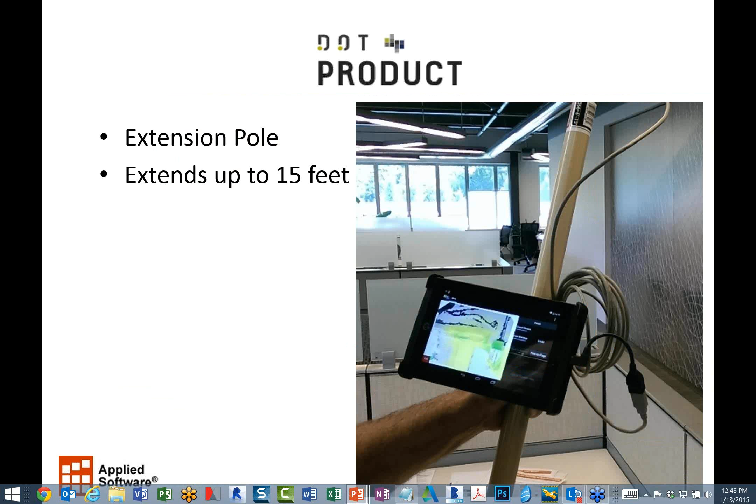So hopefully that's given us some context of the point clouds and what the scanning is. Let's look at how this data truly is being captured. For this particular scanner, they have this proprietary software called Phi.3D, and basically it's launched on the tablet itself, and it goes through a little bit of a calibration.

Because if you remember, I said this was optics, so it's kind of doing the Wall-E thing, zeroing in, dialing in its eyes to get the right calibration and information. Once it's on and warmed up, ready to go, we can hit basically the start button in the upper right corner, and it starts to capture that information. Even if it's gray, black and white information, it's still capturing it.

But eventually, when we start to kind of wash the scene, they almost give this washing motion, and I relate it to like a bad spray paint job where we're overspraying and capturing information. But again, you're moving around, we're able to go left to right and up and down, and it's tracking where you started.

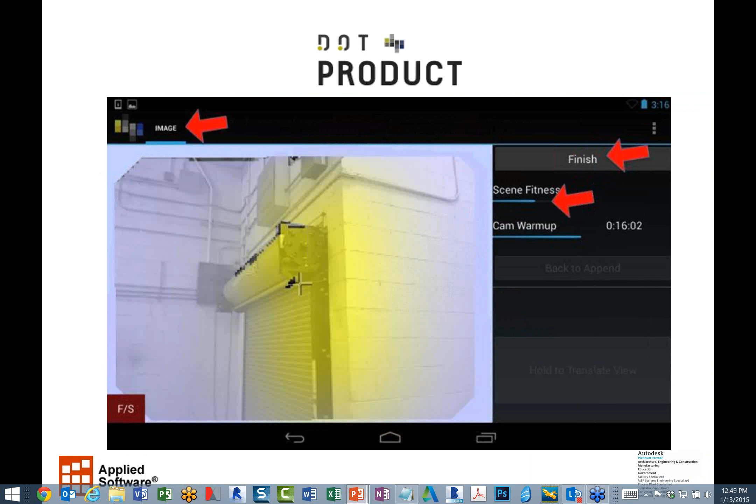So it knows this overhead door spool corner condition, it recognizes that, so as we move away, it remembers and knows where that data and information is, and it will be tracking from that location.

But if for some reason you slip, you trip, you jump, or somebody asks you what time it is, and you move the scanner really fast away from it, it will actually give you a message saying, hey, I lost the tracking, I lost where we were, but it's very forgiving, we can go back to a known point, and it will pick up that location, and we can continue scanning. Sometimes it will flash like an orange screen to say we lost the tracking, but it's very forgiving to come back and do that.

Now, one thing before I would want to leave an on-site scanning job like this is to make sure I have everything. So this has given us the opportunity to look at this data, to spin around, see what did I miss, or if it is something I missed, is it furniture or something I don't care about.

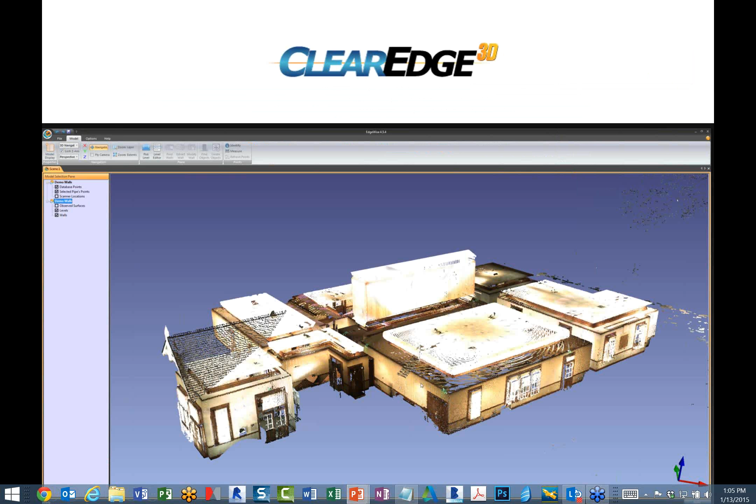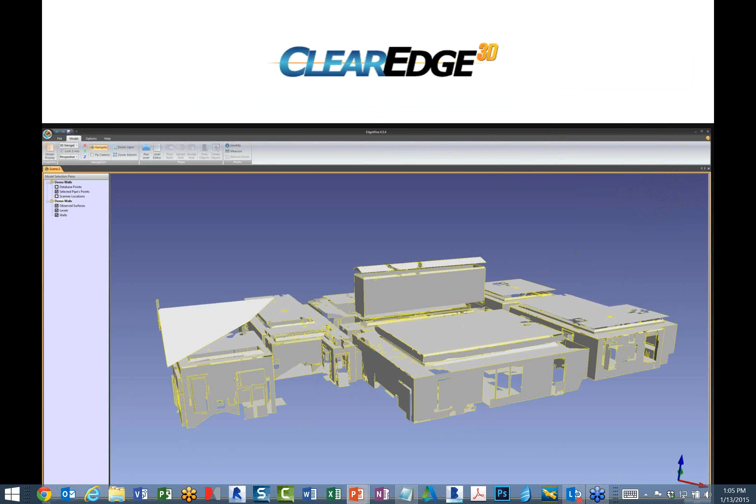So if I go in and turn off, up here in the upper left corner, some of the point cloud information, it then shows me the shell or the extrapolation of what it sees as flat surfaces that represent these planes or vertical wall surfaces. This is a matter of a minute - I brought it in, I turned this off, there it is, I'm seeing it. You can see some of these might have missing data, there's some gaps, that's partially due to the scan. Could be that some of the scans were missing or erased. But it's basically showing me what it interpolates as these wall surfaces.

And we haven't really even told it to chew or process anything yet. The next thing with this software is what I call building this sandwich. So it's already identified these vertical surfaces. The next thing is to find these flat surfaces, the horizontal surfaces, which would represent the floor, the ceiling, a soffit, a roof condition, or something.

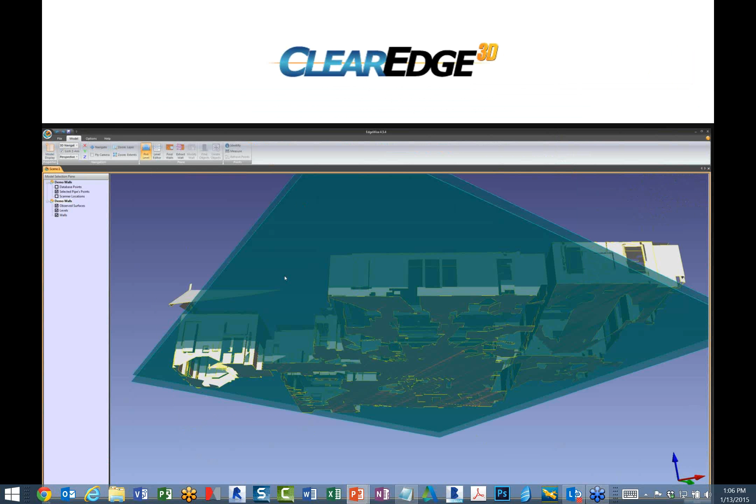So we're basically telling it, we're coming in here picking a level right here - I'm spinning it upside down, picking the floor, and you can see this particular scan has some holes in the floor, which is fine, could be furniture, a pool table, whatever. The folks, when this was scanned, decided we don't care about that information because we're going to just put in a complete floor. We're not going to waste extraneous time scanning chairs and furniture and pool tables. But basically what we're doing is building these planes.

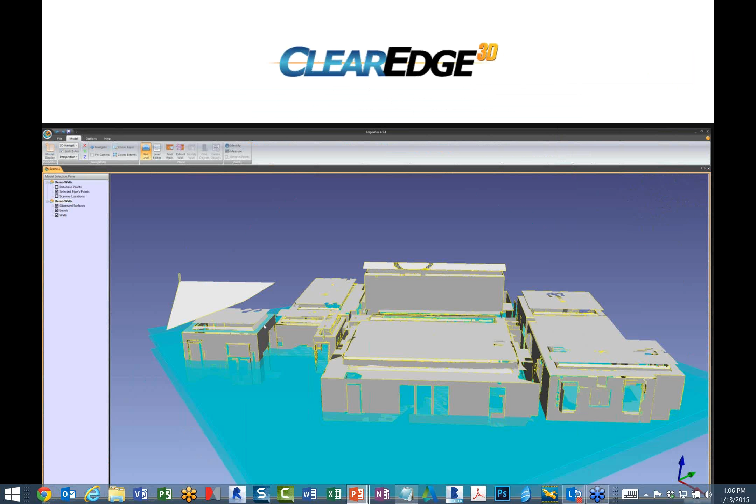This is my floor surface. There's another portion of the building where the floor is up a little bit, so I'm building these sort of levels as I go. Here's another perspective, clicking on different things, saying this is the floor, this is another level. Moving to a different angle, you can see this series of surfaces in here - soffit, roof, ceiling, whatever it may be.

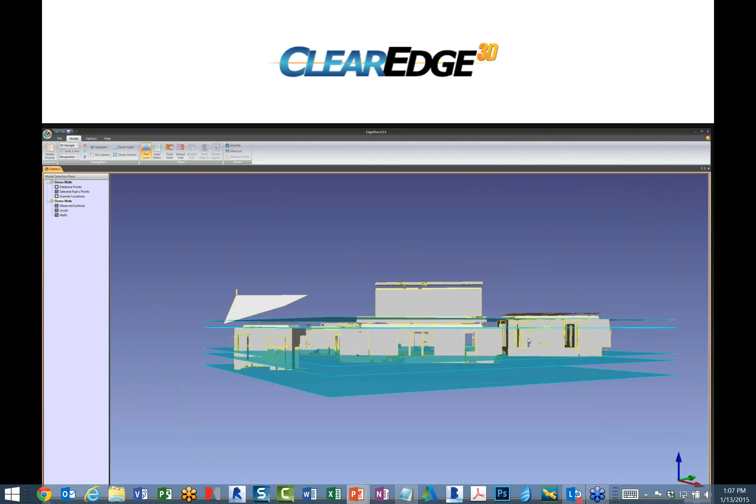And I'm basically building this kind of scanned virtual 3D model sandwich. So I know I have these vertical surfaces, and then these horizontal planes. The ClearEdge software is using that data to read and extrapolate - it's saying here you have a flat surface plane on the bottom, and some vertical plane information touching it, going up to a certain height to another sandwich level, if you will. We're going to interpolate that and say from that plane on the bottom to that plane on the top, my vertical wall surface - we think that's a wall. We'd like to convert that to a solid surface for you. And that's really the next step.

And then by turning off those levels temporarily, just a click of the button to uncheck levels, I can see this extrapolated wall surface condition, going from the bottom of my plane I picked to the top of the plane I picked, the vertical surface, and it infills to say we think that was from one end to the other. We're just kind of rectangulating this information and filling it in as a solid object, solid surface right now.

And again, that's within minutes of going through this process. Just another angle of it, seeing that stuff. But it's smart enough to say, here was a surface, here was an object.

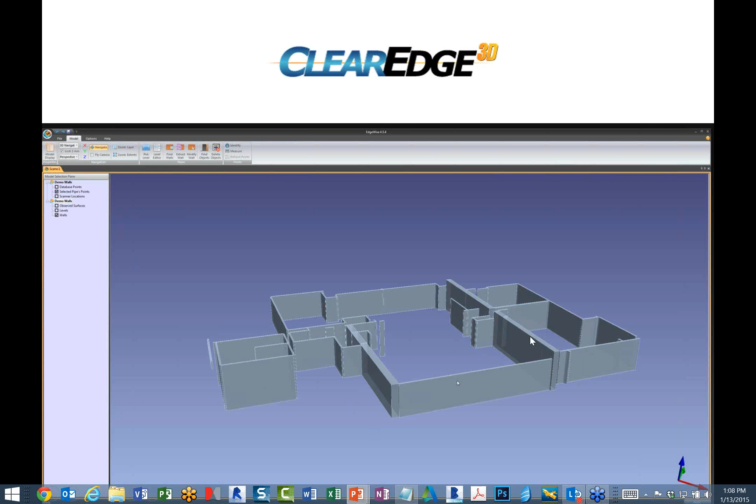We only scanned the interior, so on the outside it says there's nothing for me to reference. I'm going to take that wall, turn it into a solid surface, and give it a default 5-inch thickness. That's sort of what it did on these edge perimeter walls. But some of these walls that have a larger thickness, it was comparing a scan on a wall in one room to a scan in another room, saying those two are back to back with nothing but a void in between. So it's going to make a wall that merges those two together for us.

Now, no scan is perfect. There might be missing data, some things don't connect, there's always adjustments you can make. This is where we can make adjustments here in ClearEdge or downstream in Revit, whatever is more comfortable for you. But just to show you, there are tools here to grab the edge of that wall, pull it over, adjust the thickness, or account for something that's stopping short because it didn't get scanned in that other area.

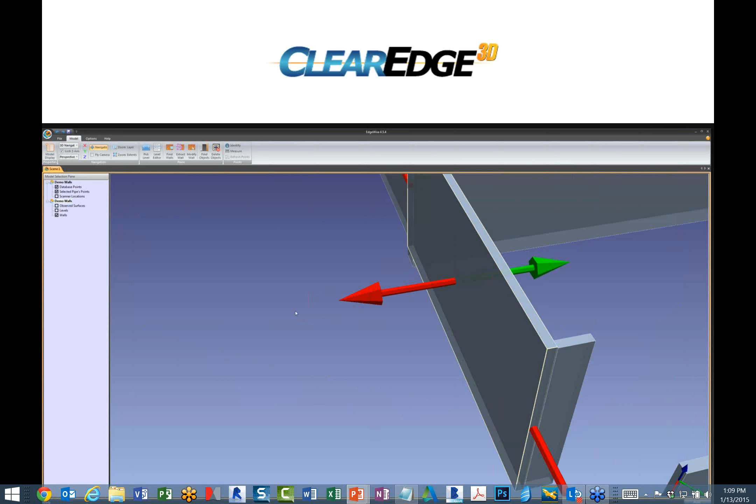Here's a different angle, giving you the positive and negative side. The green side is the internal side, the side it was scanned from. We can adjust thicknesses and change things to whatever makes sense for our needs.

Now if I click this button to turn back on the actual scan data, the point clouds themselves, you'll see I can now see the solid surface walls but also the point cloud file data. So I can get a comparison of what was scanned versus the information, giving me a better understanding, and I can adjust these thicknesses.

Now, some scans might have missed a corner or something - you see it's kind of a void, missing this wall condition over here. Well, there are tools here where I can actually extract a wall and draw some information, fill in that missing gap, and make it happen. I could just wait to do that in Revit since I know I can do it quickly, but here I can infill it as well. If you're not going to do it in Revit, you might want to do it here too.

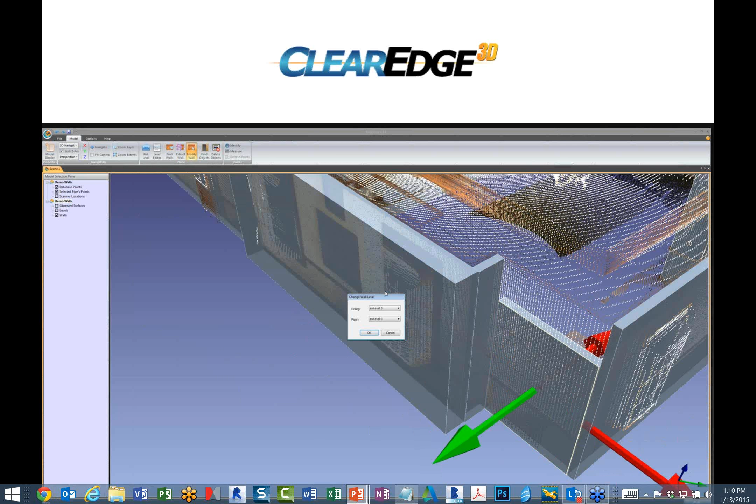But it's basically asking, where's the floor plan? What level is the floor plan at? What level is the ceiling at? That kind of thing, so I can draw it accurately and have a nice completed full wall.

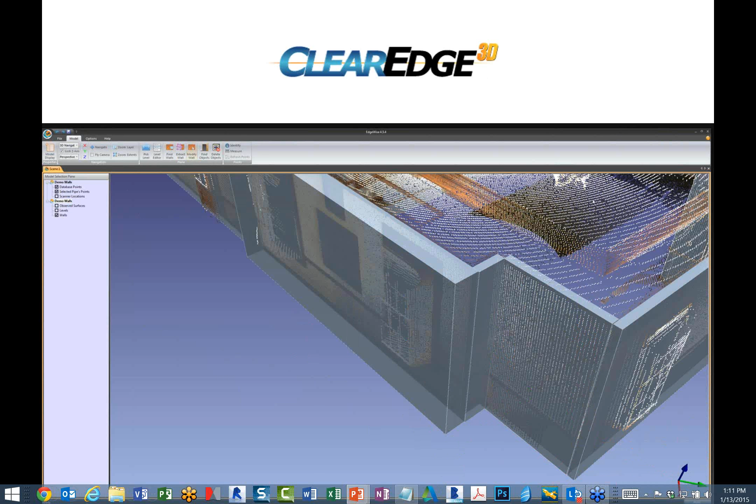And one thing not to be concerned about is how these walls sort of just butt up at the corners to each other - that's going to clean itself up nicely in Revit. Same with these corners here, it'll know how to do the cleanup radiuses of them. So we don't have to spend a lot of time really tweaking or messing with that.

Okay, so here's my scan data with the point clouds turned on.

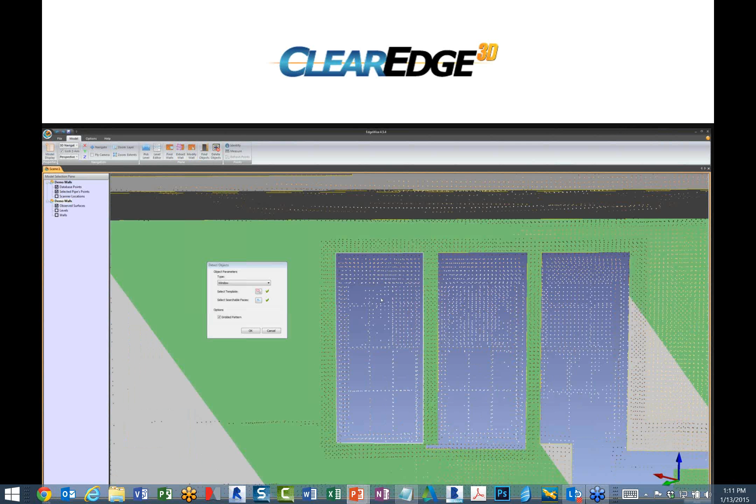Another feature in here is we can basically extrapolate our windows and opening conditions. You can see I have the scans turned on there, we can see where the windows are. Let me position myself a little better so I can see it. I want to tell it, let's detect these windows - I'm just going to pick this wall, it turns green, and tell it to find the openings. Basically, it's looking for the planar differences.

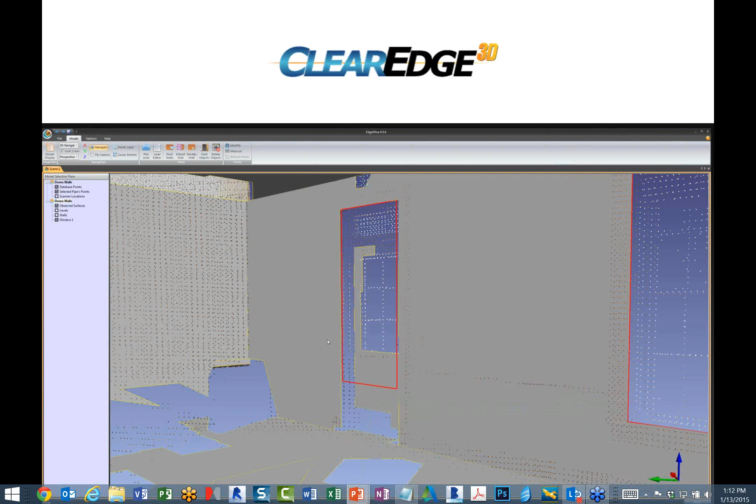It's saying the wall is flat, windows are usually pushed in or something's pushed out. So it's going to detect that, start to process and interpolate, and then identify and say, we're looking for these window conditions - we found them, outlined in red here. These are some windows we want to create for us, which is fantastic. Now, it also happened to take this door, which has an interesting transom window above it, so we could convert that to a window and deal with it later in Revit, or just remove it for now and focus on these windows.

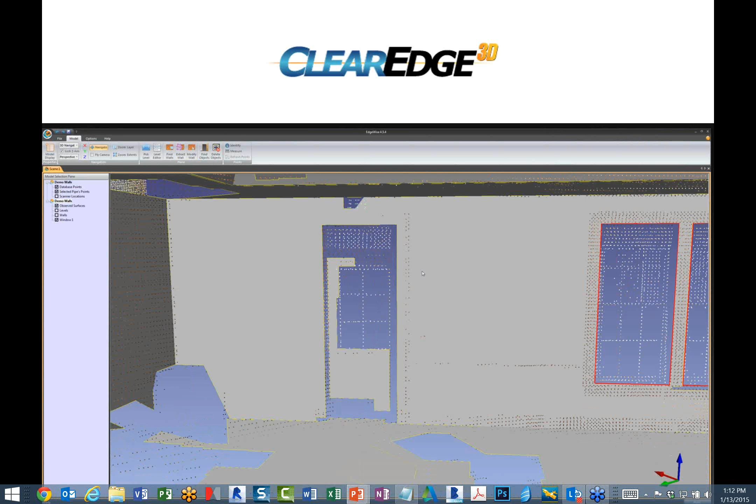There are additional components it's not going to convert, like furniture or unique ceiling conditions, or certain components that are adding to this as you go. But if we look at it in the aspect of having all this stuff scanned, processing it, and getting into Revit, as opposed to sitting there with a pen and paper measuring the existing conditions, the old workflow.

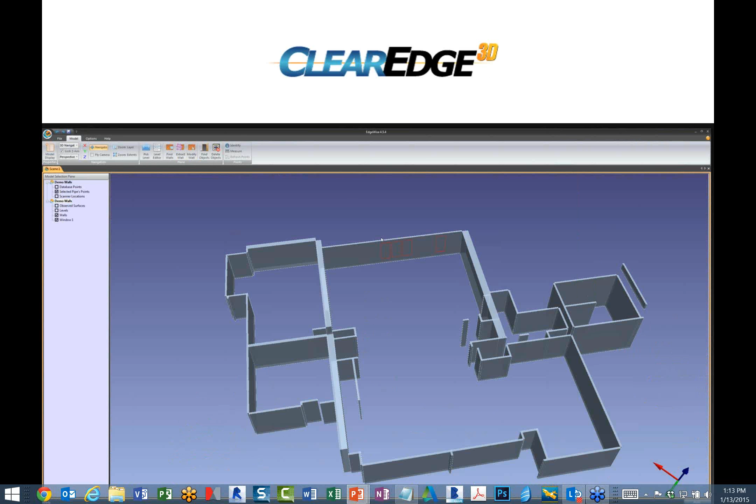This is a huge improvement from a time standpoint. All right, so now I have this data, and I have my openings. It's recognizing it. Let me just turn off that point cloud data to take a look at what I have. I can see my wall conditions, I can see the window openings. Those all look really good. And now I'm ready to take this out to Revit.

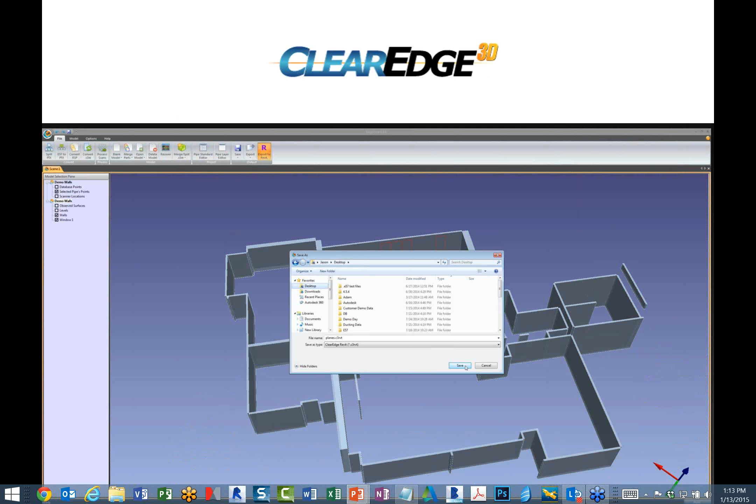So you can see this button here, this is an export to Revit button. We can also just do a regular export to the left of that, which would just be export to like a DWG sort of thing. But when we do this export to Revit, which I'm thinking a lot of you are using, it's going to create this basically ClearEdge Revit file for us temporarily. So it's basically just going to extract this out. It's going to list out saying, what do you want to include?

All our objects, all our information - I guess if you didn't want certain things, you wouldn't have to take it. But it's actually going to extrapolate that out, it's going to start to process it. As it processes it, it's actually taking it out to Revit, and it's going to launch a session of Revit for us. Okay, so we're kind of done with the processing pretty much for right now.

So shifting gears, we've processed it. This realistically is taking me longer to explain it than it is to physically do it, which again, this processing software is just to move us downstream. So if we move now into looking at Revit...

Launching your Revit application, and to refer back to what I said, Revit can read raw point cloud files. There's a lot of different file formats. The problem is it sits here as an index - it takes the whole thing in for you, and it actually creates it as an RCP file. We don't want to have to do that.

That's the advantage of using this processing software, this ClearEdge software, is allowing us to bypass that and basically say, hey, I'm going to open up this particular model that came out of ClearEdge, and it's going to open it and launch it. And it actually gives us - I apologize, screen resolution and sizes are hard to see, but this is in Revit. There's actually an Edgewise tab in here, again, because we're launching it from ClearEdge, bringing it through Edgewise into this Revit thing.

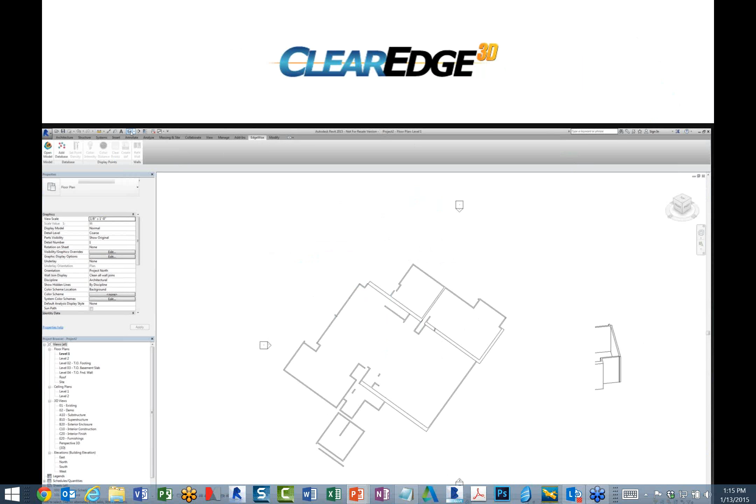And basically, here's my model. I'm in Revit - it took all that data, processed it through the point cloud, made it solids, and is now putting it into Revit. Here is the beauty that I got to explain to this - it's different and unique than any other situation. It didn't bring the point cloud data with it. It extrapolated and converted it, brought it in as true Revit families.

Okay, so if I clicked on a wall, it might have a ClearEdge or EdgeWise abbreviation on the front of it, but it is a Revit wall - it just has a different name. So I can click on that, and if anything it wasn't sure of, it's just going to make it a 5-inch generic Revit family wall that you can swap out and do whatever you want to. Same with the windows - they're families. Big difference - it's not just extracted surfaces, they are actually Revit components and families.

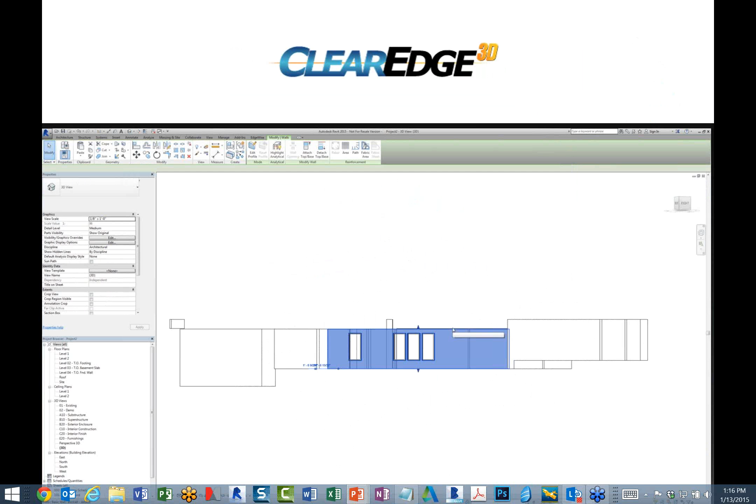Now I mentioned this tab, this toolbar up here - we can start to use that to maybe compare, look at some stuff, because Revit likes to take things and make sure they're nice and square in Revit. Well, you know how sometimes walls in the real world are wavy.

It's going to try to straighten those out a little bit, and we might want to just verify a couple things. Say this wall here - I want to selectively bring in the point clouds associated with that. So I can do that. It asks me where those database files are. We bring them in, and you can see it's putting the point cloud information right over top of that wall.

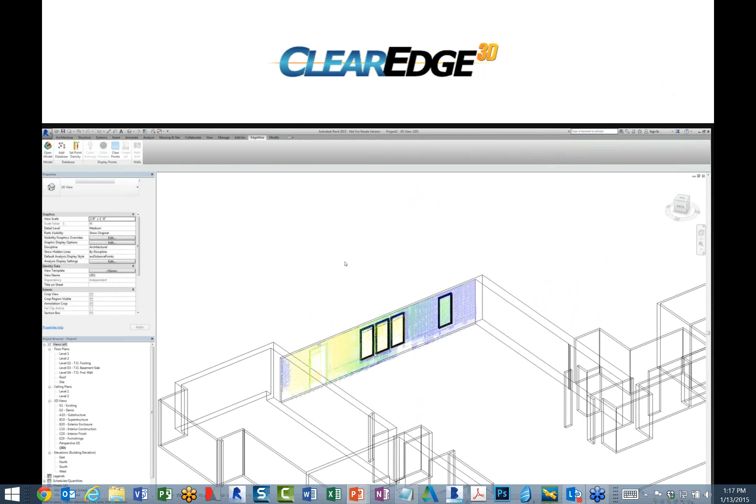The yellow means it's a little bit in front. The green means it's dead on. The blue means it's pushed back. So this wall in real scan might have been off a little bit. We can use this as a measurement tool to pull that back, adjust that - either bring the wall to the point cloud or the point cloud to the wall.

Either one, we can basically control it and tell it that's my wall, select it, let me fit it, and you see it's all green now. We basically adjusted that because this is a Revit thing - it likes to keep things square.

So once we're done with any kind of tweaking or comparison, we don't have to worry about a bunch of point clouds where selecting the whole building lights up. This is all true Revit data and information now. Once we do a save for the first time - file save as - it will save it as a regular RVT. We'll lose this edgewise little toolbar here, because they figure you're done processing and doing some different stuff. So we're really now back into our workflow, and we would continue on from where we need to be.